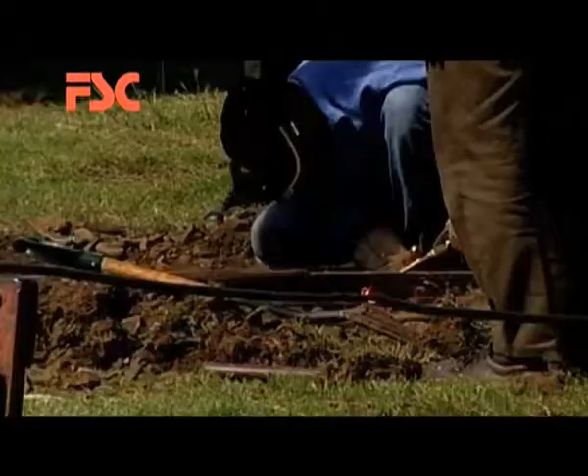1973 saw the establishment of the Fiji Sugar Corporation Limited, or FSC, which took over operations from CSR and SPSM Limited. In 2006, the Fiji Sugar Corporation Act was repealed, allowing the FSC to be governed solely under the Companies Act. In addition, we also own and maintain the entire railway network on which sugarcane is transported to the mills.

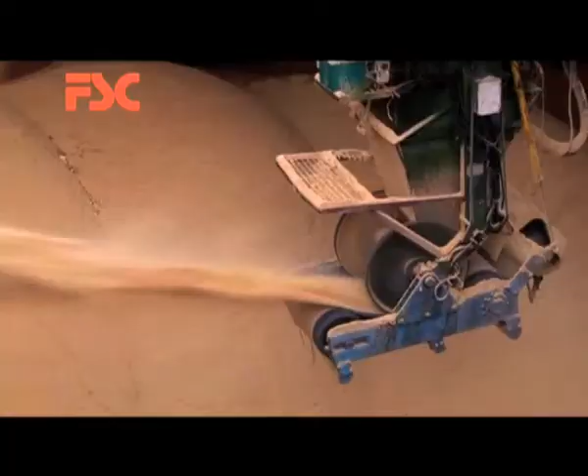We are one of the largest sector employers in Fiji, employing around 2,000 individuals during peak crushing season. Our principal objective is to competitively produce and sell high-quality raw sugar. In doing so, we are committed to enhancing efficiency, quality, developing new market opportunities, and maintaining long-term relationships with customers.

The board of FSC is appointed by its shareholders. Board representation also includes key stakeholders. Its aim is to bring together people of the right caliber with a diverse range of business experience and expertise.

The board meets regularly and sets direction and policies that ensure FSC's future viability. In commercial practice, we are keen to conduct our business with integrity, responding to national goals and seeking equitable return on investment for our shareholders.

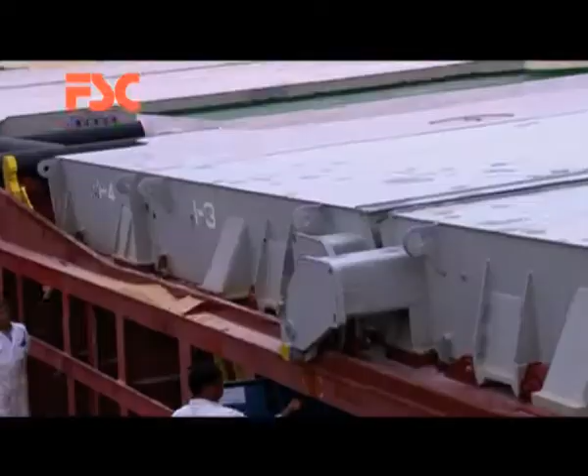Our Executive Management Group, or EMG, provides the leadership and day-to-day management of the overall FSC operation. It consists of functional managers who are based at FSC's head office and the 4 mill general managers based at each mill. It meets regularly to review operation and formulate strategies for continuous improvement.

The EMG is well supported by a team of professional and experienced management staff with expertise in various disciplines such as engineering, production, agriculture, IT, supply chain, administration, and finance.

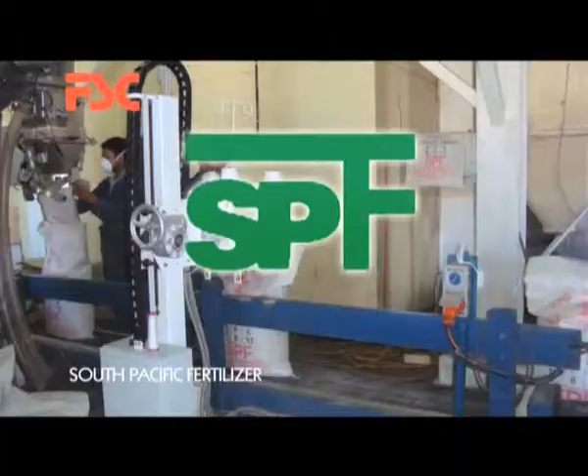While maintaining our integrity and focus on our core business, we enjoy and maintain a cordial relationship with our sugar industry stakeholders, like the South Pacific Fertilizer, iTaukei Land Trust Board, landowners, farmers, Sugar Industry Tribunal, employees' unions, Sugarcane Growers Fund, Sugarcane Growers Council, and the Sugar Research Institute of Fiji.

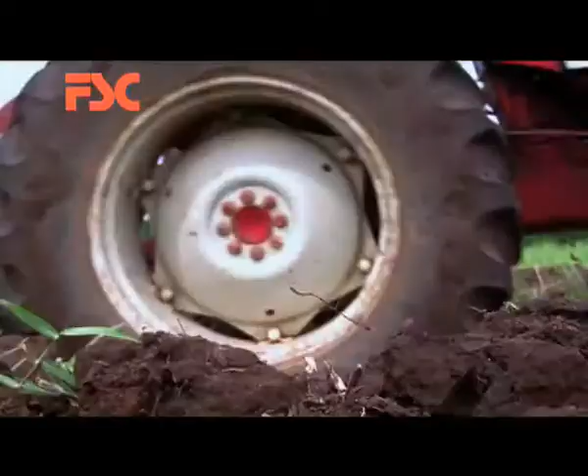In the field, we work closely with our industry partners and stakeholders to ensure the right quantity and quality of raw material are supplied to the mills on time. We help facilitate planting, fertilizing, growing, and harvesting of the best regional cane varieties at the right time and in the right way.

14 cane varieties, all bred in Fiji except for Ragnar, are approved for planting by farmers. The 4 main varieties accounting for over 80% of the annual harvest are Mana, Mali, Ragnar, and Vatu. Cane farmers are offered the choice of at least 3 varieties depending on soil type, with one of these varieties being the preferred one.

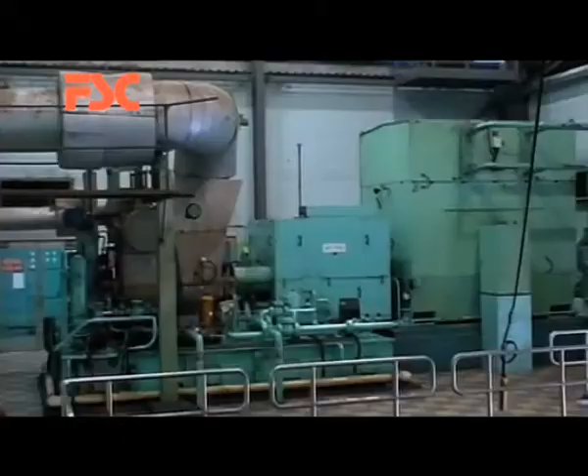To maximize sugar recovery, we ensure there is a continuous flow of cane from field to factory and maintain the rail transport system operation. Part of our long-term plans to improve efficiency involves looking at ways of improving the transportation of cane to the mills by taking responsibility of the whole system.

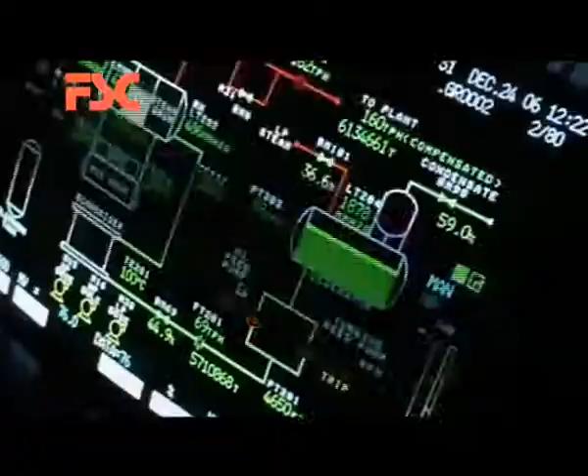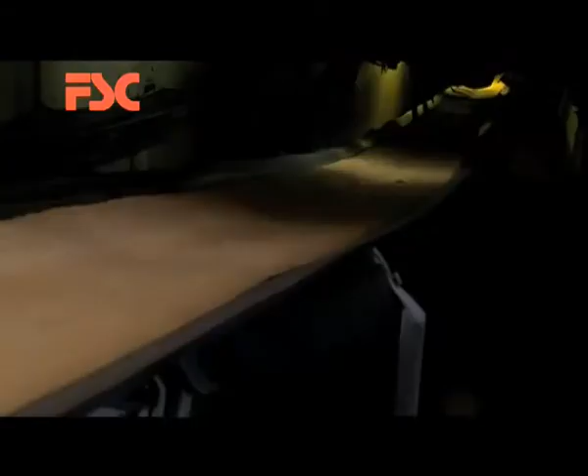With the introduction of new technology, we aim to maximize milling and processing efficiencies to be on par with global standards, resulting in maximum recovery and capacity with minimal stops and producing the best quality of sugar. The storing, shipping and marketing of our end products at maximum revenues to the full satisfaction of our long-term customers is a necessity for continuous viability of our operation.

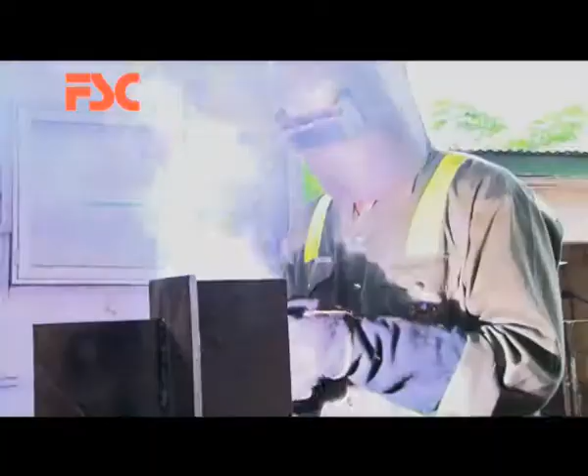Our priority and number one asset is our people. We continue to reward, nurture teamwork, innovation, and invest in the health, safety, and personal development of our employees. We encourage consultation with our employees and strive to maintain a cordial relationship with our union representatives.

Embedded in our vision is our long-term commitment to assist the community and our staff welfare in its development by the promotion of better living standards. Our staff and employees enjoy the benefit of various sporting and social activity facilities located within our premises. We are involved in the management of primary schools at Lautoka, Rarawai, and Lambasa. The school roll is also open to the public.

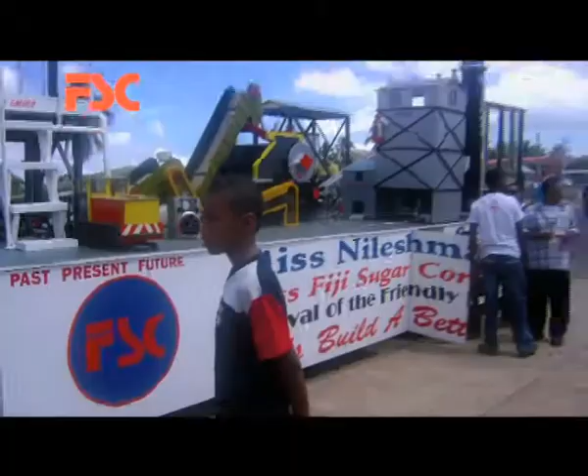Over the years, we have actively supported and contributed to various community activities and centers. These include participation in festivals, running of charitable organizations, and other community self-help schemes. Our staff and employees have played leadership roles in many of these activities.

The FSC is forever mindful in sustaining the earth, Fiji's natural resources, and people. Our commitment in this area sees significant injection of capital funds in the upgrade of our mills and installation of new equipment with monitoring devices and control systems.

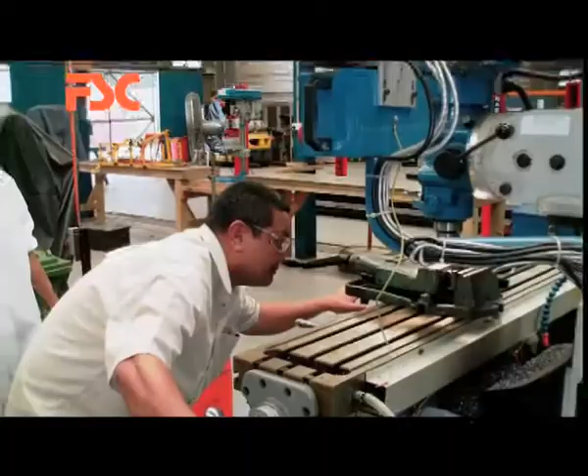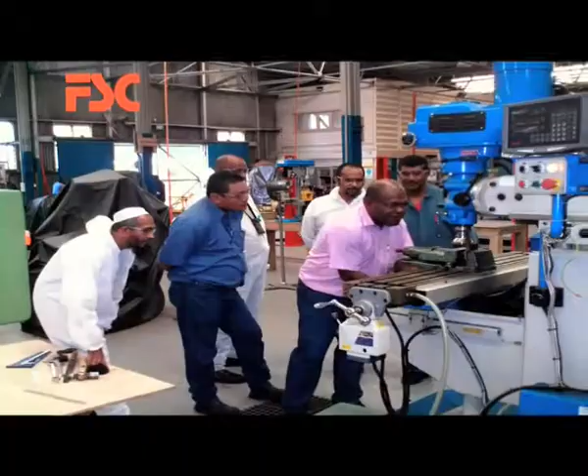The role of our training department is to engage our staff in various training and capacity building programs that primarily focus and prioritize the organizational, occupational, and staff individual needs. To ensure our training programs are on par with global changes and market demands, we continuously work with training providers like USP, FNU, APTC, and other training providers locally and abroad that equip our staff with the latest business strategies and technology.

Manned and supported by qualified and experienced professional staff, our Information System Center's main function is to provide the information, communications, and technology-related services to the FSC.

Our supply chain team's role is direct management of all our supply chain activities with regards to the purchase of goods and services. The central supply concept hinges around the purchasing function of all mill requirements as well as head office.

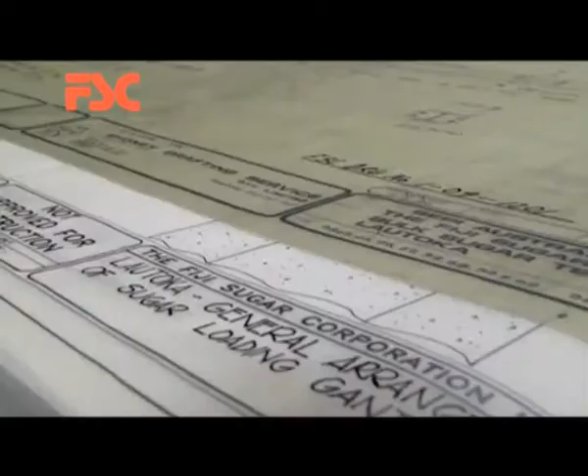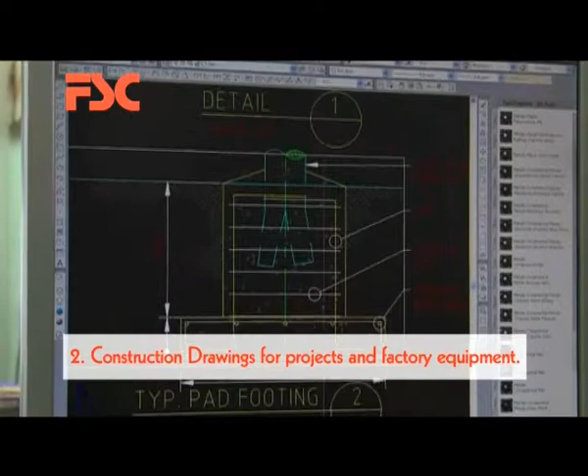Our design services was established in 1978 to cater for the preparation of construction drawings required for capital works for the maintenance of the 4 factories. It provides: 1. Technical advice to factory technical personnel. 2. Construction drawings for projects and factory equipment. And 3. Archives all drawings of the factory's machinery and equipment.

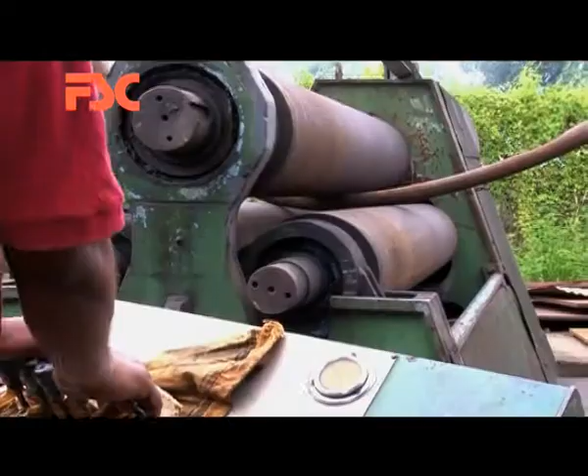Our Corporate Engineering Service, or CES, was resurrected in 1988 in the wake of the major capital investment drive. Since its existence, it has played a major role in executing capital projects and maintenance works for the 4 sugar mills.

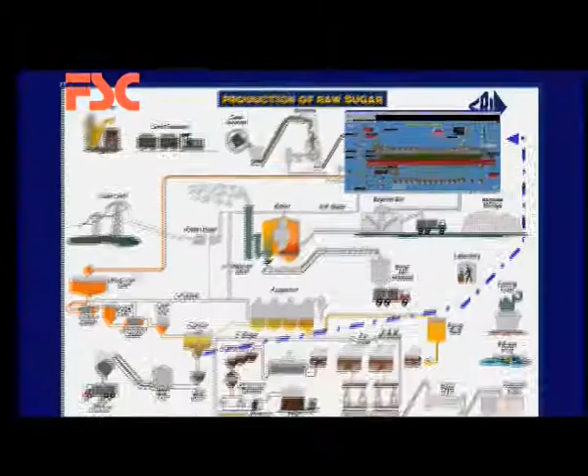We now take a quick look at the main processes that take place in raw sugar manufacturing at our mills. The manufacture of raw sugar from cane is a highly technical process which requires large and costly manufacturing equipment. 8 main stages are involved.

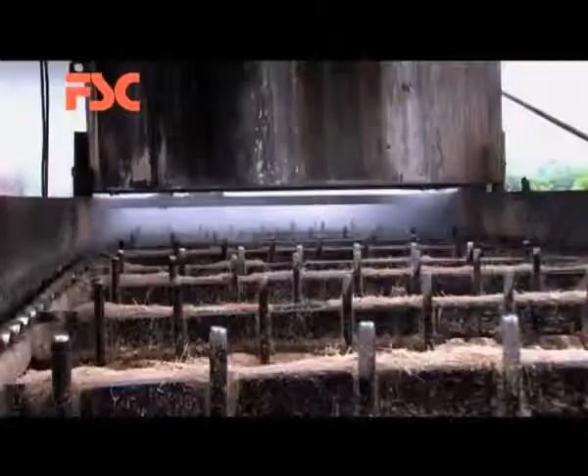After the cane has been weighed, it is tipped into the cane carrier, which then conveys it to a set of knives and a shredder, which chops and shreds the cane into a fibrous material. The inner core, now exposed, contains the stored sucrose.

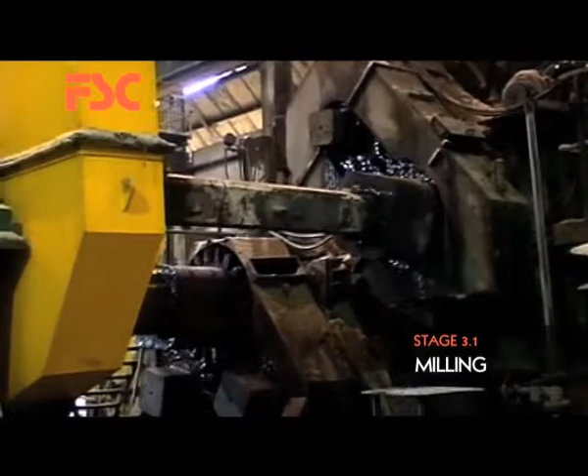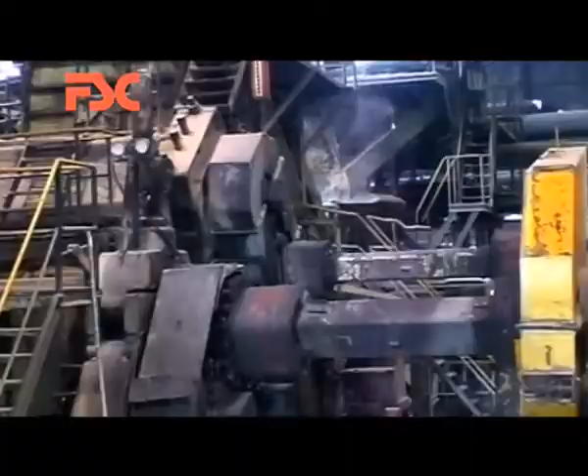Pairs of rollers feed the shredded cane into a series of mills. Each mill consists of 3 large rollers, each weighing as much as 15 tons, all arranged in a triangular formation, so that the cane is crushed twice at each mill.

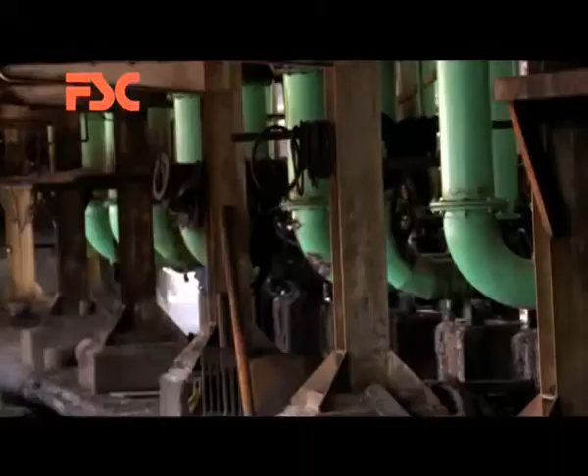A recent innovation at Lautoka Mill uses the diffusion process to extract juice. Juice extracted from the cane is pumped into the milling process, and the remaining partially dry fibrous material, known as bagasse, is used as fuel for the boilers.

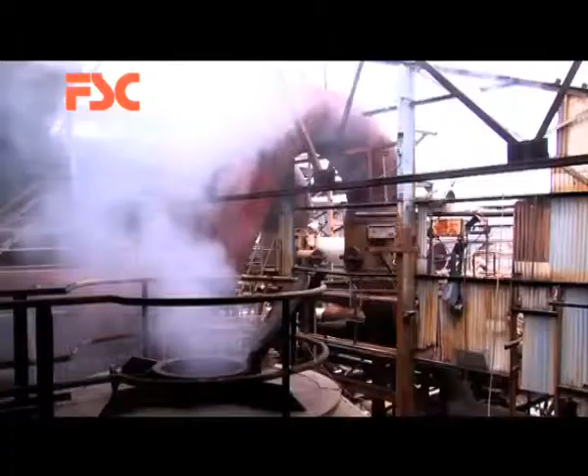All the power used in the sugar mill process is generated internally through steam from the boilers that drives the turbines at the mill powerhouse. Excess power is also exported and sold to FEA for supply to the national grid.

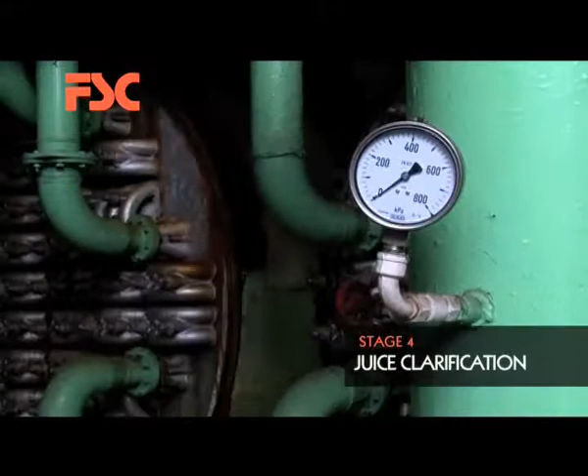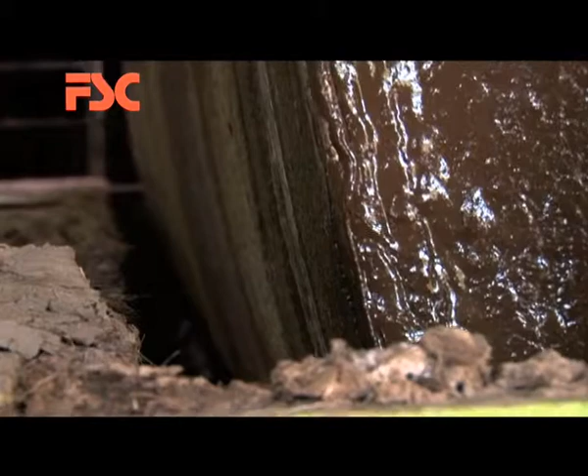The raw juice is treated by heating and adding lime. This separates the mud and impurities from the juice. The clear juice is then decanted. The muddy juice is filtered under vacuum. The juice is returned for processing, and the mud is returned to the field as fertilizer.

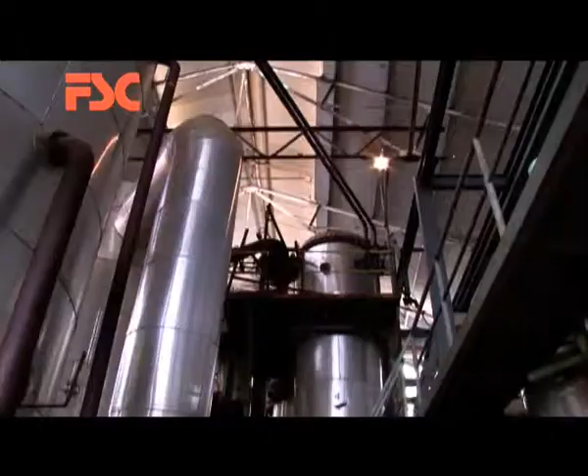The clear juice is concentrated to syrup by evaporating most of the water from it under vacuum in a series of connected vessels called evaporators. The syrup, now about 70% solids, is again boiled under vacuum, this time in huge containers called vacuum pans, where more water is evaporated. When the syrup is sufficiently concentrated, crystals reach a predetermined size.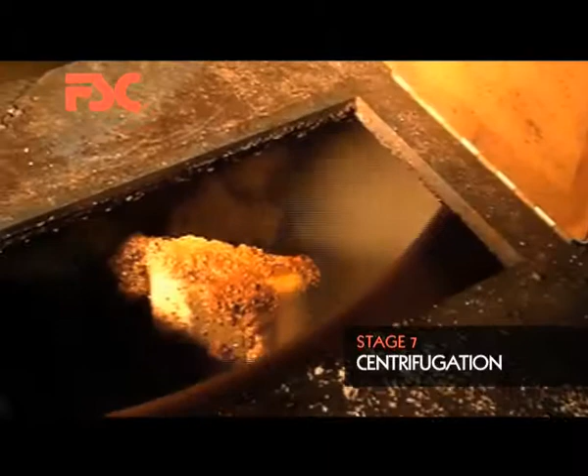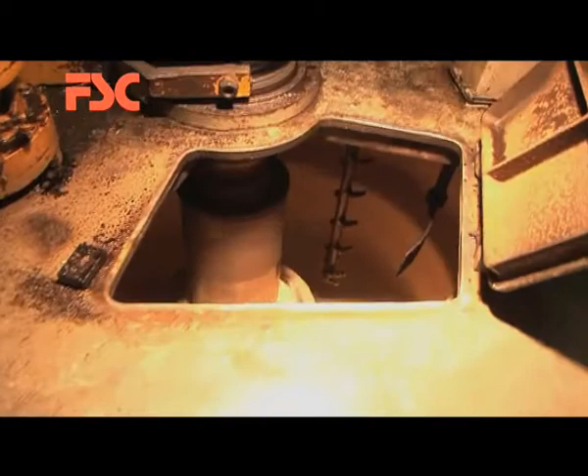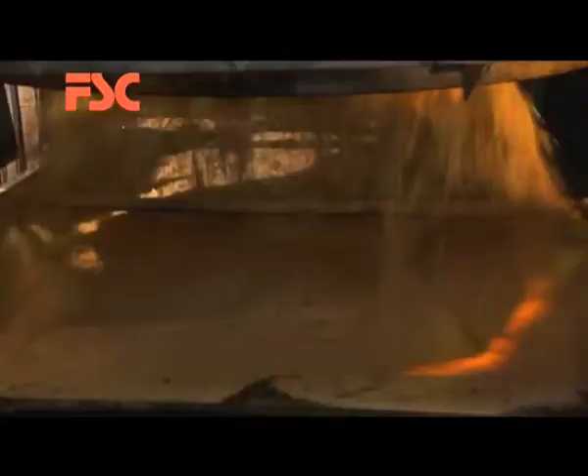The crystal and syrup mixture is released through the bottom of the pan, then spun in centrifugals to separate the crystals. Centrifugals are baskets which spin in a casing at high speed. The dark syrup surrounding the crystals is thrown off through the perforations. The spun-off syrup is boiled again, and more raw sugar crystals are recovered. This procedure is repeated 2 or 3 times until further extraction is fully exhausted.

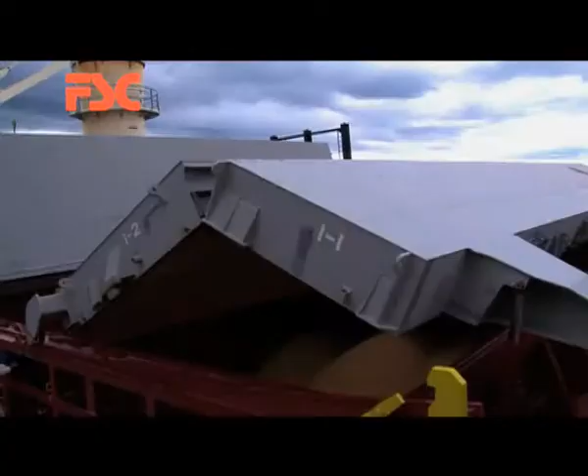The raw sugar from the centrifugals is then dried by tumbling it through a stream of hot air in a drum. It is then cooled down with cold air before being stored, awaiting bulk shipment overseas or bagged for local consumption.

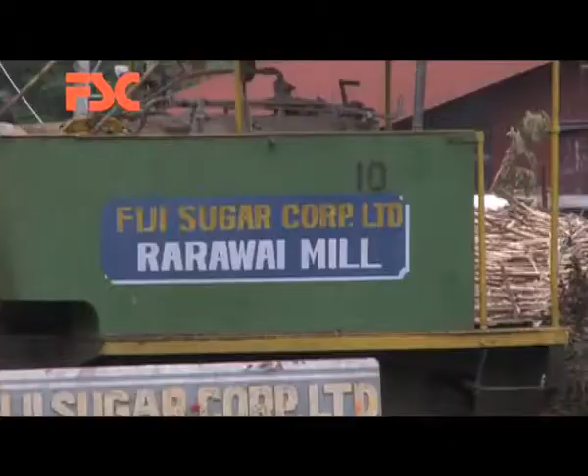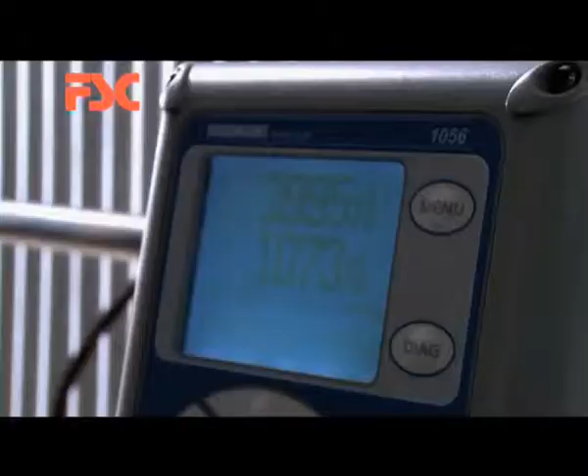Today, our 4 sugar mills carry out the entire sugar and molasses manufacturing processes. We continue to invest in our sugar mills in order to boost factory efficiency and sugarcane processing, moving forward with the latest technology in order to be globally competitive and viable, continuing to engage various expertise from abroad to train locals on best work practices for maximum sugar recovery.

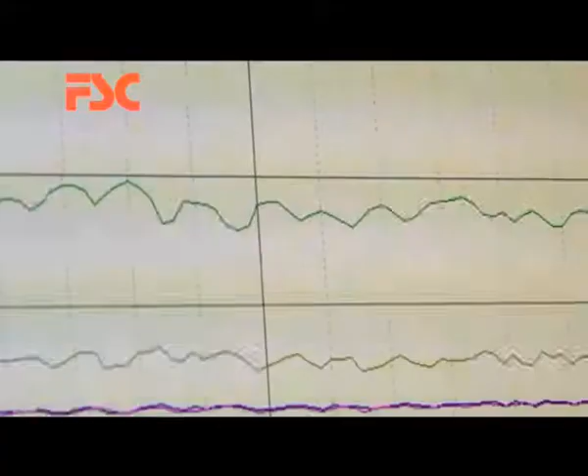We have also started diversification projects such as cogeneration, ethanol production, sugar refining, and specialized sweeteners in supporting our vision to become a successful industry both locally and internationally. We are confident that we will continue to grow, adamant in maintaining our prominent position as industry leaders, and we will positively contribute to our country's overall economy.